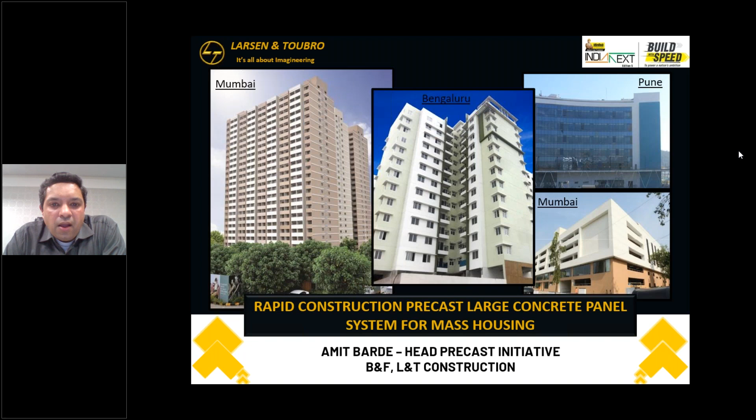So just a little bit about the company. Of course, all the numbers are there. I'm not going to spend time on that, but what we take pride in is being a professionally managed company and one of the most innovative companies. We call it Imagineering, not just engineering.

There are various verticals amongst the company. Again, I specifically come from the buildings and factories group right here, and that's where the focus is on buildings, and again more on residential construction. Not a lot of people actually know L&T in the residential space, right? Usually it is all infra and huge projects, but we do a lot of residential work. Usually in line with the company's name, the largest and the tallest L&T, what we call it.

So a lot of projects that you see, more than 250, 300 meters, that are going on in Mumbai in the residential space. Mass housing, if you see the project on your left, there are 6 tall buildings, right? It's like a city on its own. That's the kind of projects we're looking at. Of course, on the commercial space, public space, we have the Statue of Unity, one of the recent projects. The T2 airport was built in that commercial space.

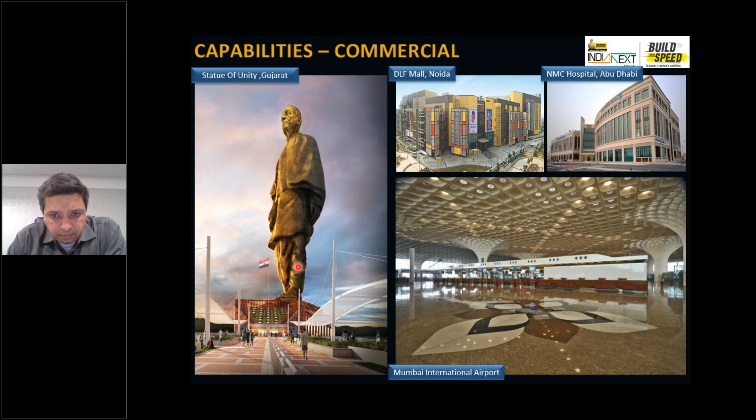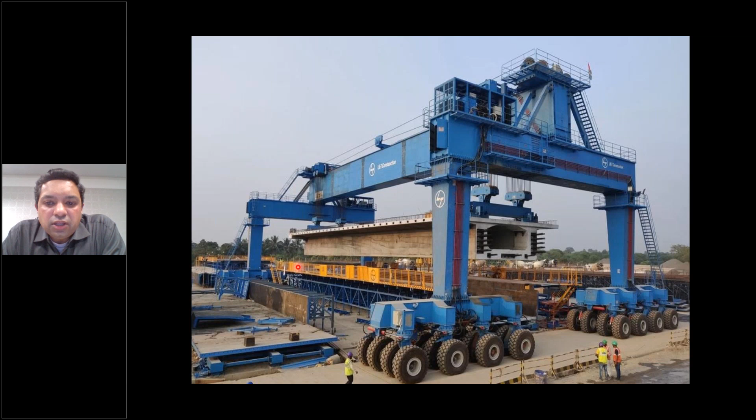If we come to precast specifically now, the Narendra Modi Stadium at Motera, that was total precast, one of the very recent buildings in the precast space. And of course, now we are building the high-speed railway, right? This is all going in precast. What you see in the picture is one of the most indigenous and unique systems where we are lifting 40-meter long girders for the high-speed railway. The entire assembly, what you see, is automatically controlled between those 4 columns that you see with the wheels, and all built in India. None of that was coming from outside.

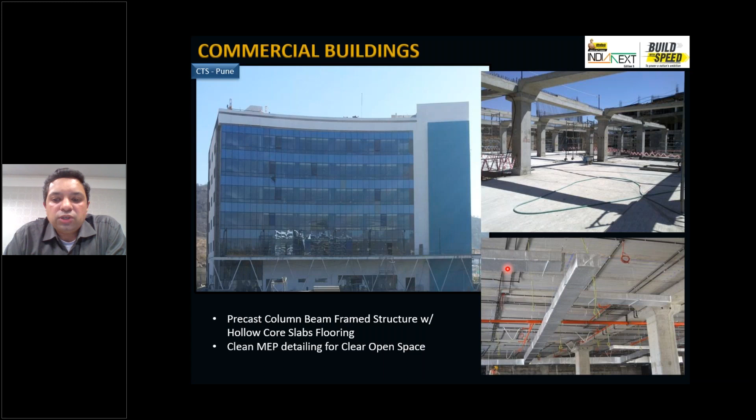This is a Cognizant Technology building in Pune. This is one of the first buildings that we did in precast, around the 2011-12 time frame, right? Commercial building, total precast, columns and beams, and then hollow core, usually 8 to 10 meter grids. Usually with the hollow core system, a lot of questions come on MEP, that it needs coordination and all. If you do that coordination well, during execution we did not have a single complaint or query from the MEP contractor on this job. This was one of the first jobs.

Then this is a parking structure. If you are from Mumbai, when you go to your domestic terminal, you will see this on the left-hand side. If you see it from outside, you don't know if it's precast or conventional. That's the idea. We put a lot of effort into bringing the technology where the end user should not feel any difference just because we have chosen a different technology. So this again was total precast, beams, columns, and hollow core system, same as that CTS building that I showed.

This is in Bangalore for Wipro, where you see all these bands. They were not initially conceptualized in precast, but once we started building, because of the building insets and all, it was becoming very challenging to do it in conventional systems. So only those elements were quickly converted to precast.

This again is a project in Mumbai, the IKEA warehouse in Navi Mumbai. Hollow core slabs we have done before, but there are 2 unique things. It's a hybrid structure where you see a steel frame, and then the floors were put quickly using the hollow core system. It's probably somewhat difficult to gauge the size, but this is one of the deepest hollow cores that has been used in India in the building sector. It's a 400 deep hollow core element, and the span is about 16 meters. And the warehouse load is about 750 kg per square meter. So the largest load and largest span hollow core was used.

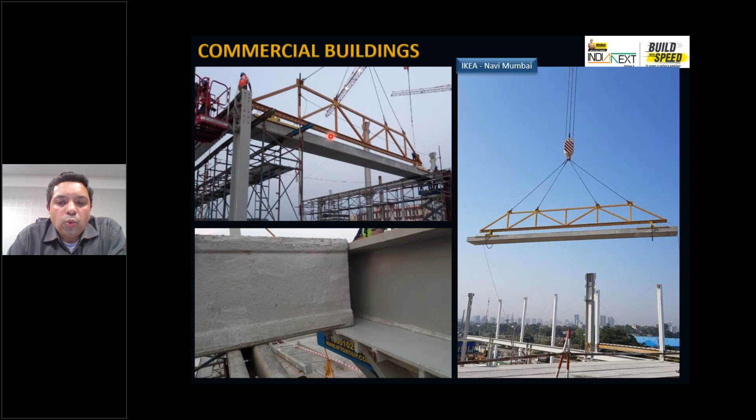This is one of the jobs now ongoing in Vizag, where we are doing a total precast substation for a refinery job, right? That substation is like the heart of that refinery. The refinery project is anywhere between 15,000 to 18,000 crore. The substation is 35-40 crore.

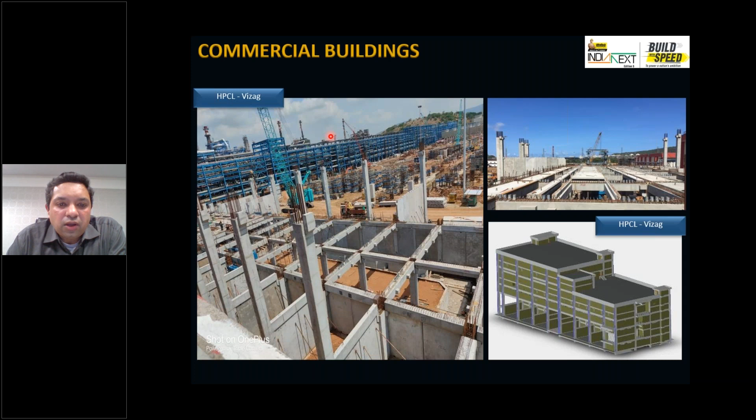Structure, but without that the entire refinery cannot survive or cannot operate. So we took that call to make it into precast, again for that speed, so they can start operating the refinery.

This is an office building in Hyderabad. When the building started, the architect had the vision of these C-shaped panels and bands, and this was conceived in block work. After starting the building, we took that call saying it's just too much block work to do plaster, and all these bands and the exterior facade were converted into a precast system.

Why I'm showing this is, even for your competition now, this is the theme we are saying: speed. Wherever that speed demand is, we are trying to make sure that, and we are going to come to that in discussions later, we move it to the factory, move it offsite, make it industrialized, and reduce site work as much as possible. So in all these key projects, at the heart of it, you're going to feel these 3-4 things, which are the need. I'm not doing precast just to push precast, right? This is coming from an inherent need of the company or the projects that we do.

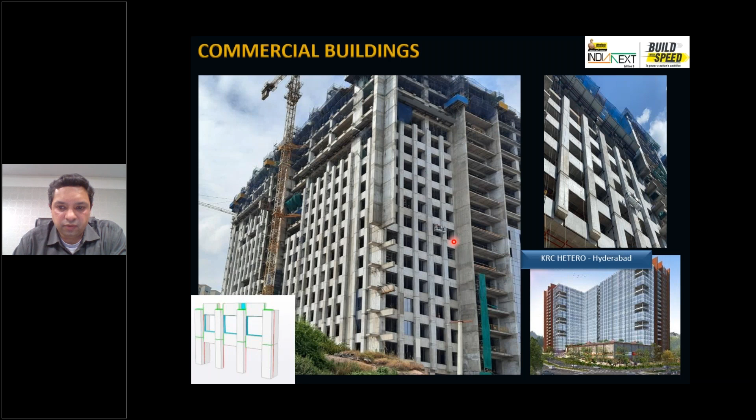So what we said is we will do precast panels, and we proposed welded connections. Usually my precast panel will take 2-3 days to finish, right? You erect the panel, do the jointing, do wet concreting. Here with the welded connections, because I have a steel structure, the mock-up panel itself was attached to the structure in just under 30 minutes, right? That's the speed, that's the ultra rapid we are looking at. Erected, connections welded, and ready for the sealant and finishing activity. So that's the crux of why we are looking at these precast options.

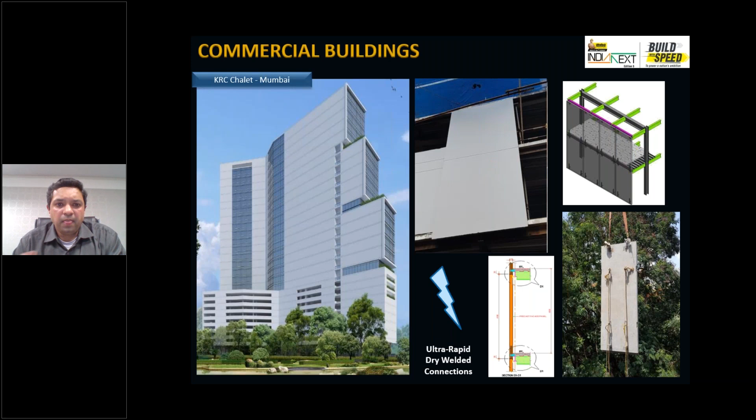Now with that, coming back to residential, from this point onward pretty much everything will be discussed around residential, and more for the mass housing scope. Mass housing is not new to us. A lot of projects over the last 15-20 years. These are all conventional system projects, but why I wanted to put it is that's the experience under our belt to know what the residential client wants, to know what the residential construction beast is, right? Commercial is a very different construction system, a very different place where you are only dealing with one client. Here you have several flats. Each flat has probably 4 or 5 people living in it, if not 4, at least 3. So that many clients you are looking at.

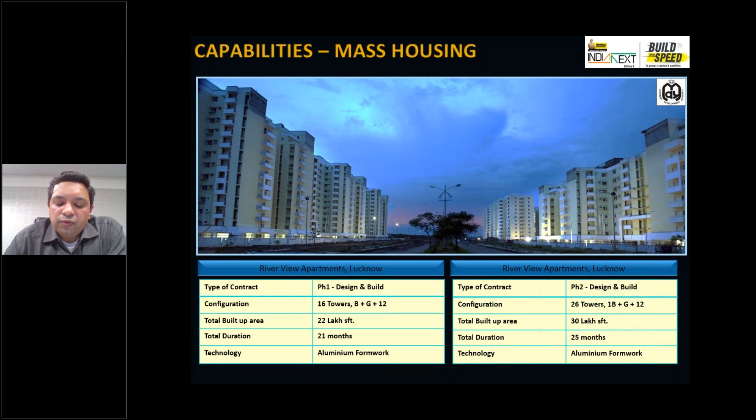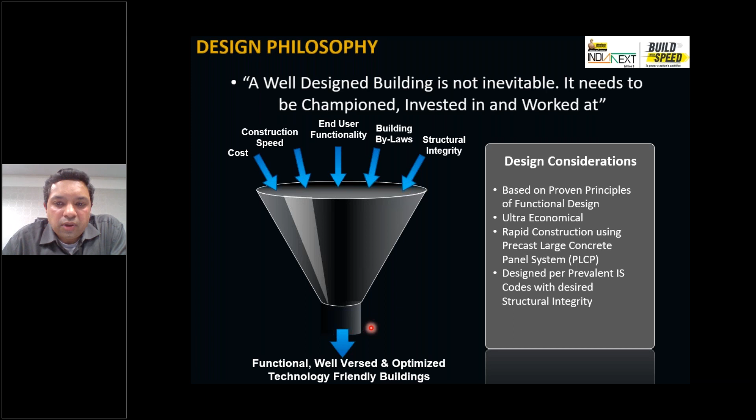So if you are looking at any new technology, all these aspects will then funnel through to get you what you want. Then it will be automatically accepted by your client and by your end user. And how you do it is not just one entity, right? It's not going to come that I do the structural design and your building is ready. You have to start from your foundation, your services, the coordination, where each pipe is going.

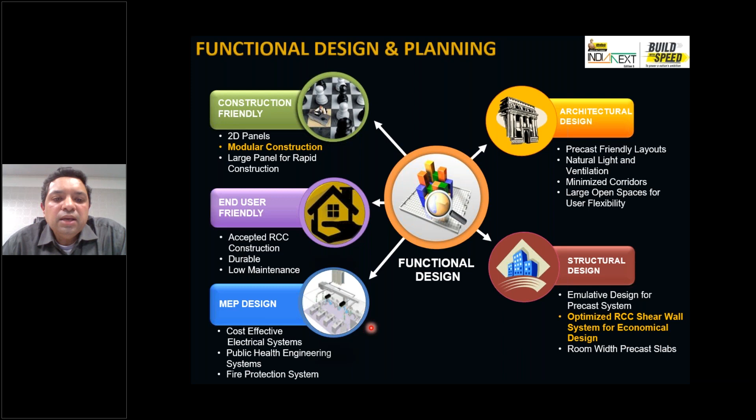This is where that beam is coming into picture, saying my plinth beam levels are checked so my rainwater pipe is not going to hit it. These are minute things where over the years this was done, for lack of a better word, jugaad, kuch to kar lenge and then we'll see. But we are not there, right? We want a functional design, we want everything right on the paper.

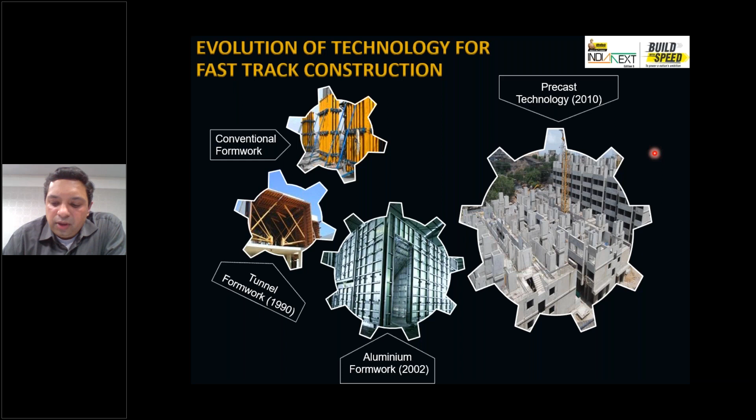With that poll, next what we are looking at is why we need precast, right? We started precast, and again I keep repeating that L&T is not in the precast business. This precast has evolved over our need. So to put the data behind it, on your screen you see we took one project, same area, same location, two plots, maybe adjacent within a kilometer or two, and one was being done in cast in place, the other in precast.

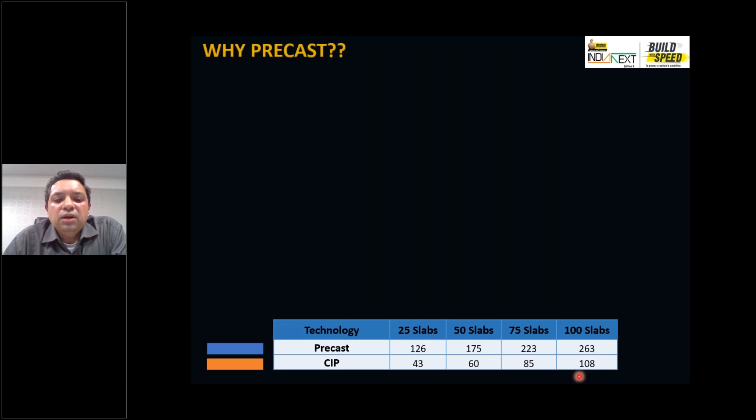We tracked the time required for cast in place construction and for precast construction for the first 100 slabs, in terms of 25 slabs, then 50, 75 and 100. If you see this data firsthand, you're going to see that our CIP is doing much better, so why would you want precast, right? This is where your technology comes into picture. What resources you're putting in, at what cost you're doing it, that's what matters, not just the number of days on the screen.

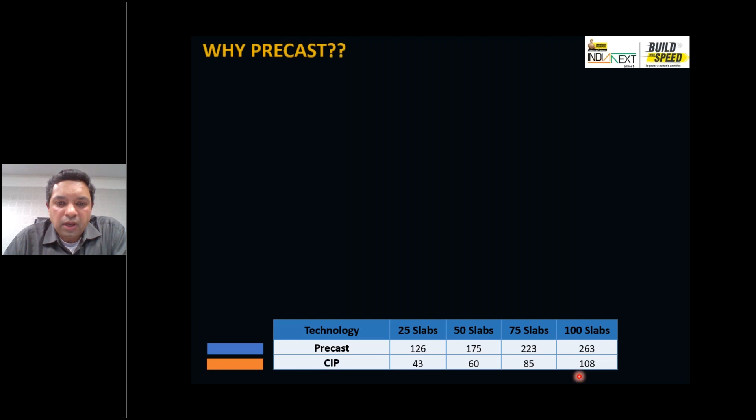When I look at conventional, this is using aluminum formwork, you have to look at how many sets are deployed. That's my key resource. If you start looking at asset turnover ratios, at what investment you are performing. In the aluminum system it is the aluminum formwork set. In the precast system, it's the crane. That's my key resource, the key bottleneck at the site. So how many cranes I have put, and per crane what am I getting out of that.

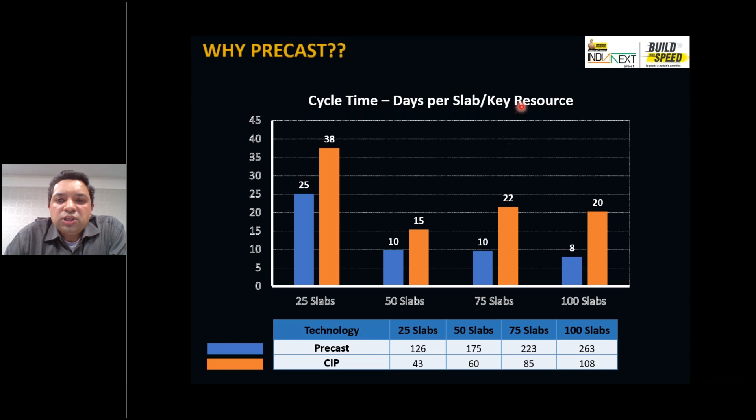If you look at that in terms of resources put and the cycle time, days per slab, you will quickly see that even if this is quicker, it was done with many more sets. There were almost 20 plus sets put in. So per set I took 25 days to build one floor in precast, and in cast in place it took 38 days to build one floor.

So it's obvious that precast is doing better in terms of your resources. If I need even more speed, because this is designed to what is planned and what the client wants, I can just put another crane and get more speed out of it. Putting another formwork set has its own issues, right?

The second thing is, if you look at how we improve things - these two projects were not going at the same time, there's some delay between them. Usually you take a little more time when your project warms up, and then you improve your speed. This increased again for the COVID second wave, and then it maintained. If you see precast, this has quickly built up, and once it built up, it sustained that cycle time. That's what I wanted to drive through this.

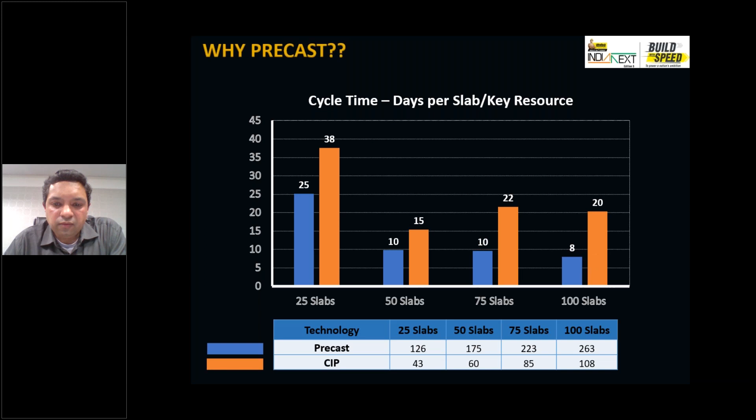The other thing - if I do the same project again, whatever we estimate usually, if you look at aluminum formwork, we want fewer people at site. We want less resources so that my risk is lesser. One of the biggest risks in construction today, especially residential, is having your workforce at site. If you recall, when COVID waves hit, the biggest challenge was getting people back - even media was talking about it. So if I have fewer people doing the same work, my risks are less, the challenges are less. In terms of that entire activity in aluminum formwork, per cubic meter of concrete I need about 5.5 man days, so assume I need 5 people there.

For the same thing in precast, which is conventional precast and automatic precast - this is what we are doing now. We can even go to fully automatic, what the global industry usually does, and it will improve even further, but I've kept it at where India is right now, what we are doing at best. I'm looking at 2.5 man days, so it's about half. But that's not the real story.

Out of these 2.5 man days, I need about 1 for production and only 1.5 at site. So if you compare site activities between precast and conventional construction, I have about 70% reduction of site activities or site requirement of people. This is where I'm covering my risk - I don't have to worry as much about having the workforce at site. Workforce at factory is a very different ball game. We have a much higher retention ratio at factory because they're working in a controlled environment, at ground level, covered shed. I don't have that worry of not having people - whoever is there, they always stay.

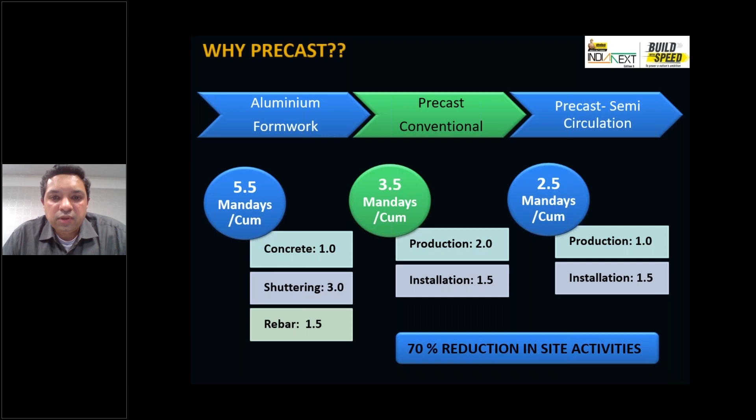So in a nutshell, what we are doing on the other line - if you look at conventional construction at site, the activities these 5 people or 3 people are doing: building the formwork, putting the reinforcement, doing concreting, block work, plastering, POP, painting. Since we took up the aluminum formwork system itself, we have completely avoided that work - this is the work where you need maximum workforce, the block work, plastering, and doing that leveling and everything. So instead we are doing this shear wall system using aluminum. Forget precast for now - even why aluminum became popular is because these activities were removed. I'm going to talk about that a little more later.

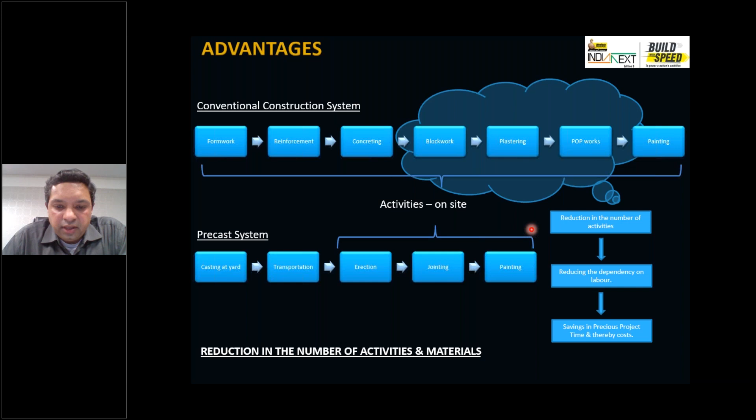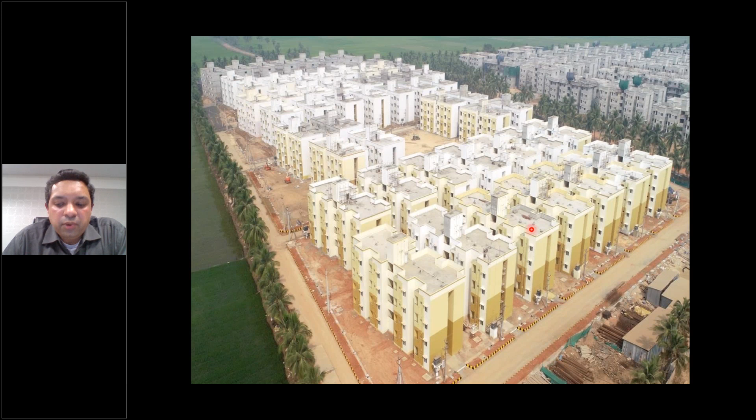Now what we are doing in precast is still - this takes a lot of time, that 5.5 people per cubic meter we talked about - we are taking it off site and doing everything in the factory, finishing it there, then bringing it and installing it. That's the idea, and where we will adopt it is in projects like this - this is our AP housing project, 1 lakh houses straight. This is what they wanted, same buildings, and this is basically our housing demand. We keep talking about 12 crore houses everywhere, but if you look at a single project in nearby 3-4 plots, they had this demand of building 1 lakh similar houses, ground plus 4-story tall buildings, and you cater to that. Now how do we solve that challenge?

We just look outside, right? We look at our neighbors. We are not the first ones to go through this challenge of social housing or mass housing. Singapore has done it, Shanghai has done it, Tokyo has done it, Hong Kong has done it - all these countries have done it. And these are just our neighbors, with similar setups and similar situations. How long did they take? They took about 20-25 years to do that. And we are looking at doing it in 7, 10, maybe 15 years now, but at a drastically smaller time period. This is where speed comes into the picture.

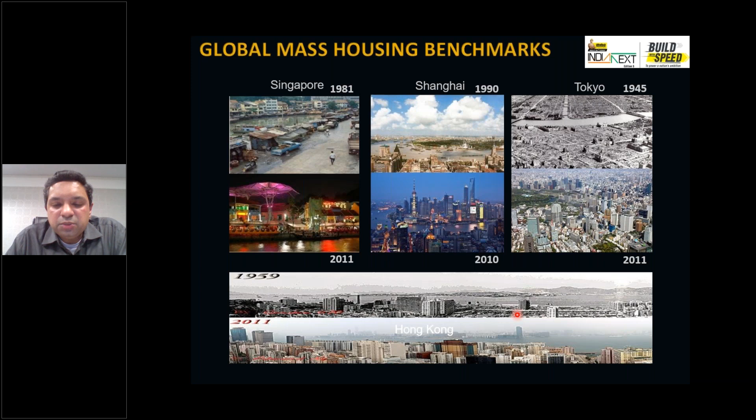How will the speed come? Using technology. Have we not adopted technology? In all other aspects of construction, we have adopted technology, right?

I am from Mumbai. We are building the metro all over Mumbai, the coastal road, the Trans Harbour link connecting Navi Mumbai to Mumbai, and the high-speed railway. Some of the latest and greatest projects using the greatest technologies globally are being operated in Mumbai at the same time. They cannot get better than that. But still, when it comes to residential construction, we are lagging.

We have to do something, and this is what we are doing. How these other guys, our neighbors, are doing it, the only answer that comes for all these countries is industrialization and mechanization. Is there anybody now stitching our own shirts? No, we are not stitching our own shirts or our own shoes. There are factory made products in that range, and we are very well adapted to do that.

This is where residential construction has to go. There are set standards, set standard units, especially for mass housing where we are looking at large volumes, and whatever functional requirement exists, you put it in the factory, make it like a car, make it like a shirt, and then construct.

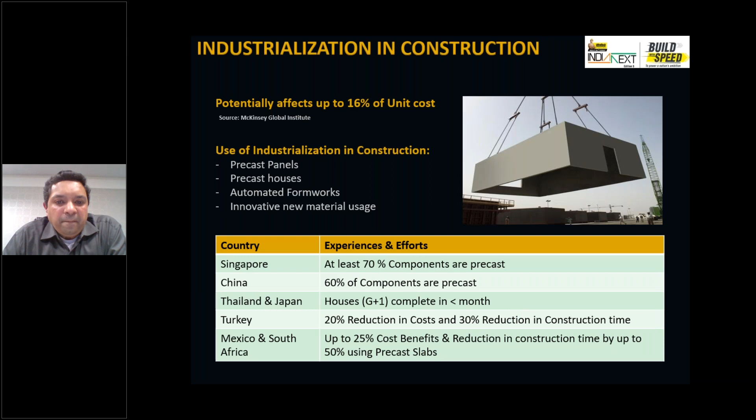So that is one of the biggest driving points, if nothing else about technology, if you want to take it home today, is this industrialization and mechanization. That's how we can get that speed. That's how we can get the answer to our solution.

But block by block, you have to set it up, do plaster. We don't have people anymore to do this work. We keep discussing on various forums with various people, and one thing discussed maybe 3-4 years ago that has stuck with me is: if you see 2006 in India, your mason's son did not want to be a mason. He wanted to do something else, maybe technology, some other job, but not construction. In 2022 now, even the mason doesn't want his son to be a mason. That's where we are, and that's great.

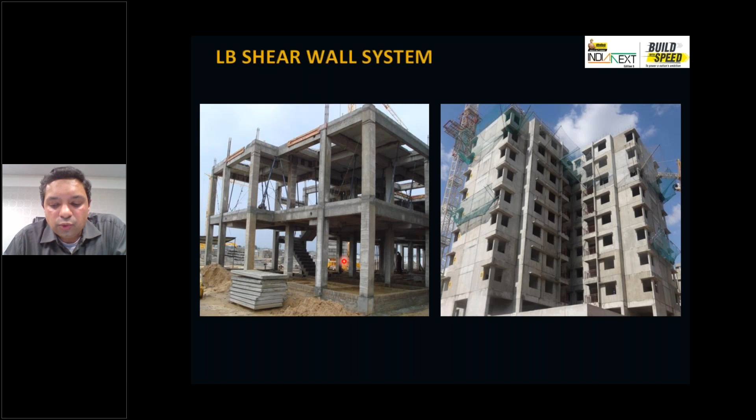India is shining, we are going forward, society is improving, our standard of living is improving, quality of life is improving. But for me, in construction, I don't have people to do the work that we had earlier, and that's where we are leaning towards this technology. So that's the second point I'd like you to take home: we don't have a skilled workforce anymore. Whoever is there doesn't want to be in construction, so very limited people are available.

The third and last point is maintenance, what your people or end users want. One of the biggest maintenance items in residential construction today is plaster, internal or external. Plaster was never meant to be a long lasting product. It cannot be, it's a sand cement mortar mixture. It absorbs water, and over time it cracks, and over time the paint fades because of this water absorption issue.

So what we are doing today, the technologies we are evolving, evaluating, or trying to adopt, not just precast but any technology, we are avoiding plaster. That call was taken in the 2002 timeframe, when aluminum formwork became popular, for this very reason. Especially in high-rise construction, I don't want to go outside, put up scaffolding and finish the building. I will pour concrete, even if it costs slightly more. The net tangible benefits are much higher compared to the upfront cost.

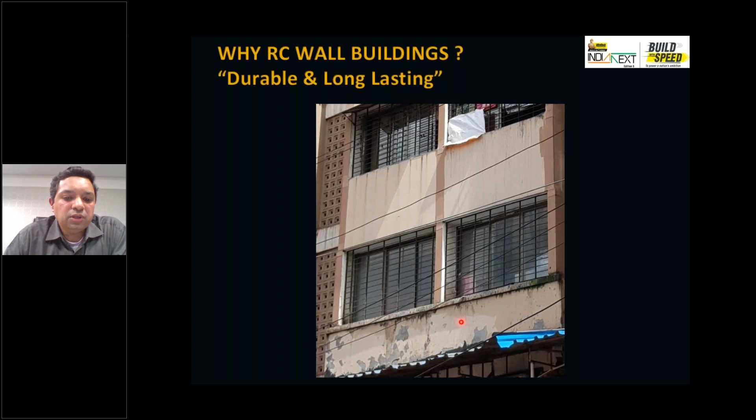And this is one example. This is our building, a precast building, but the lower floor was done in cast in place because it's a non-typical floor, done with brick wall and plaster, and the building above is in precast RC concrete. This picture was taken about 6 months ago. After 7 years, that building has been standing, and the plaster fall started right after a year and a half, that's how the water absorbs, then the moss, with the same maintenance and treatment. But on the upper portion, you see no cracks, nothing, just some shadows, but this is where the paint falls and fades. This is why we are doing this aluminum formwork system or the precast system.

So some of the landmark jobs now getting into the case studies, this is one, that same job actually, Pragati Towers in Mumbai, ground plus 23-story tall building, about 70-meter tall. Everything after the first floor is done in precast system, factory made, including your spandrels, the walls, the lift shafts, the precast stairs, the whole 9 yards. This was one of our flagship projects. That picture you saw had 3 buildings, we later added 3 more. So about 2000 flats were built in about 3 years time frame. It of course won several awards, and the building has been standing and occupied for the last 8 years now.

The second project, which I'm going to discuss a little more as a case study, is our Provident Sunworth project in Bangalore that we started in 2014. Again, mass housing, but this was for a private builder, not a government project. About 66 towers, 5,000 plus units, all G plus 12 or G plus 14 towers. Total precast system, what you see in the picture is all precast.

Somewhere in the middle of the job, we got a certificate of extraordinary appreciation from the client, so it's really close to our heart, when we finished one G plus 12-story building in flat 3 months, that superstructure was built from the first level to the terrace. That is the strength of this technology. The same footprint building in conventional construction, even aluminum formwork, which is considered the fastest now, would take at least 7 to 8 months to do.

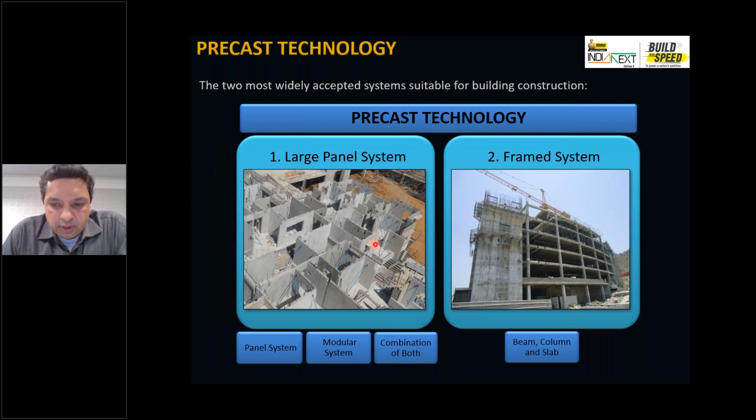What we are doing in general is, let's look at residential construction now. I'm going to take the floor plan what we have, right? We are not there where the floor plans are being built for precast. If you see the outside world, and a lot of architects will be here, so going forward, I hope the design industry shifts towards knowing the technology they are going to build before they start the drawing board, right? And the floor plans are built suitable for the technology.

Here in India, I think we may or may not go there, but again our end user has requirements. We need in and out layouts. We don't have boxy buildings. I don't see residential buildings being boxy. So what we have done is worked around saying, okay, my floor plans are going to be in and out. They are going to have complicated shapes.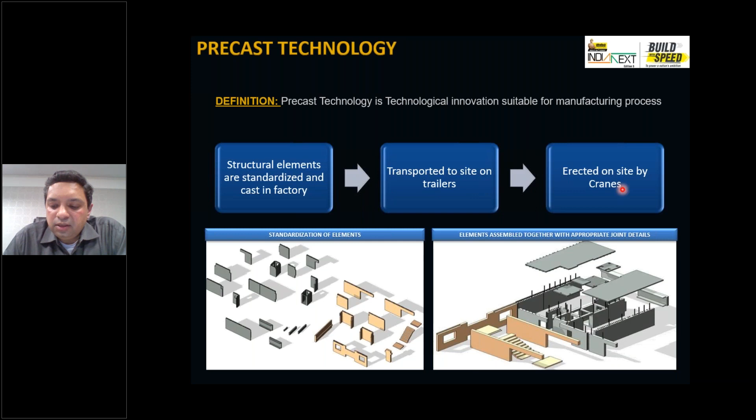I will work with those shapes and try to make as much as possible 2D panels and then convert it into my precast systems. That is the work that I have to do to make sure you get that performance out of it. Once you do that, all we are doing is the layout is ready, make these elements in the factory, put it on site, erect it by crane. It is not rocket science, trust me.

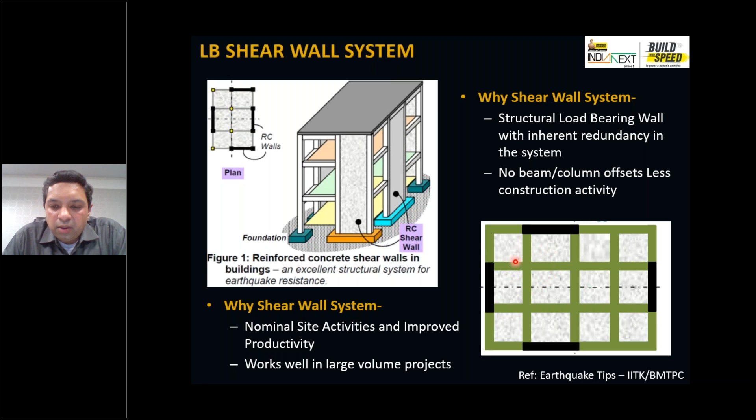How we do it: the structural system, like I said, load bearing shear wall system, that's the crux of it. There are various structural advantages to it, but if you look at this floor plan here, this is how we were doing buildings 20 years ago, where there are some walls and then your beams and columns. What we are doing is we are trying to see if we can do all walls. Some of those walls are still my shear walls, the balance are my gravity walls. It is equivalent to your beam column system, right? Not all walls are shear walls in the system.

Now once we pass this, what are we doing in precast? The precast philosophy is the next step of your aluminum formwork system, nothing else. Exact same system, same building, only thing is I split the panels and make them in the factory. How do we connect it? We are using this emulative approach, right? We can't get into too many details, but just focus on the word emulative. What that means is if you use this emulative detailing, your precast building is going to behave equivalent to your conventional building, that is aluminum formwork.

This is from the American Concrete Institute. They have specific standards for emulative detailing. They will tell you exactly what to do. If you do that kind of detailing, the wet construction connections, you get equivalent performance. There is a Precast Concrete Institute, again in the US. They take it even a further step. They said that if you do this emulative detailing, regardless of seismic region, you will get performance equivalent to that cast in place system. And this is what we are doing.

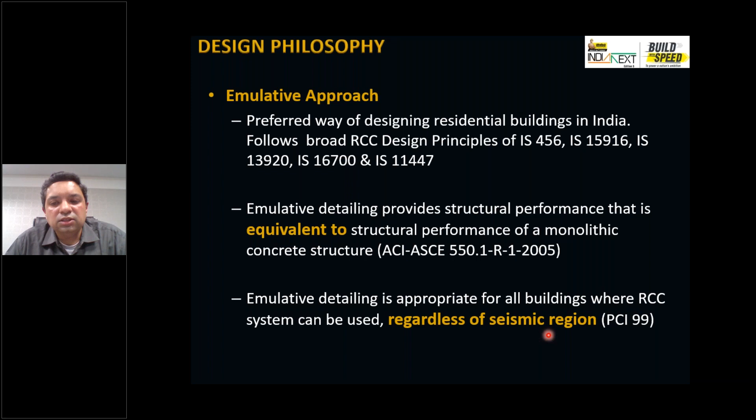What is not emulative? It's welded connections, bolted connections. We are probably a couple of years away in India from adopting those. There are various reasons. But if you want to see that emulative performance, we were also getting that question a lot. So what we did is we ran a full-scale test program in the 2016 timeframe, saying this is how I'm going to do emulative detailing, and I'm going to validate whether it gives me equivalent performance. Right? That word equivalent is important. I don't want better performance. I don't want superior performance, because all our design codes are currently built around the RCC system.

So I just want to make sure that I build one specimen in the conventional system. These are my two shear walls, foundation if you want to imagine, and a slab on top of it. This is a full 3-meter high wall, right? And we are validating the seismic performance. This was done in the SERC Chennai lab. This was one of the very few labs at that time which had this seismic actuator, which pushes the building and pulls it in a controlled manner, so we can study in detail how the system is performing. So this cast in place specimen was prepared,

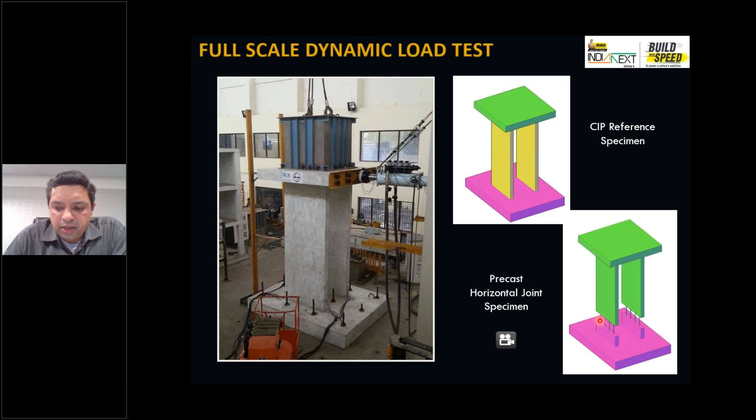and then the precast specimen was prepared using the joints, right? Again, the idea is, like I said, we want to see if they're performing similarly. We don't really care at what level. So these precast joints were emulated, and then you look at your force versus displacement curves, right? In engineering terms, that's how my toughness is calculated. The area under the curve is going to be your E values, or your R values, equivalent performance, or the ductility, as we call it. So again, precast and conventional have to behave similarly, then we get equivalent performance. And usually I get told, okay, see, your equivalent performance is not there, the cast in place wall is so much higher.

But if you really look at that, SW1 is my cast in place wall. This is that CIP construction specimen, and these two are my precast specimens, and these are behaving similarly. This is what we want. If you calculate the area under that curve, you are going to get similar performance. This is actually one of the precast connections that works better than your lap connection. That's how you see the higher values. All these walls were designed for the same design capacity, right?

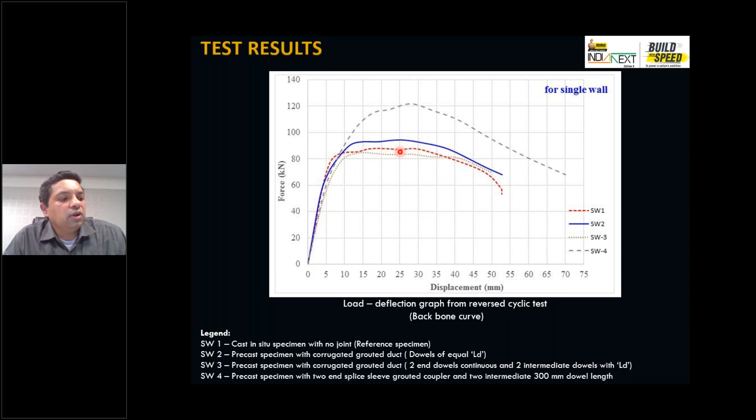So these are the grouted couplers we are using now, after 6-7 years of following up and making them available in India. But these are confined couplers, high strength grout. They use M100 grout, and that's how you get slightly better performance out of that, right? Now at that time we didn't have any testing in India, so we went to Hong Kong and got this tested for the cyclic performance. That's where that seismic detailing is important.

So if you want to look at it in one summary, this is a reverse cyclic test. So if this is your 0, it is pulling and then pushing, 95% of tension to 50% compression. So you get that cyclic behavior. They have 20 cycles, then they pull it to twice the yield and do 4 cycles. They pull it to 5 times yield and do 4 cycles, and then they pull it to failure. And the test says that your failure has to be in steel. That's where you get the ductility, and not in the brittle portion where the grouted connection is. So this is one of the key validations of how you get ductility in your precast systems, right?

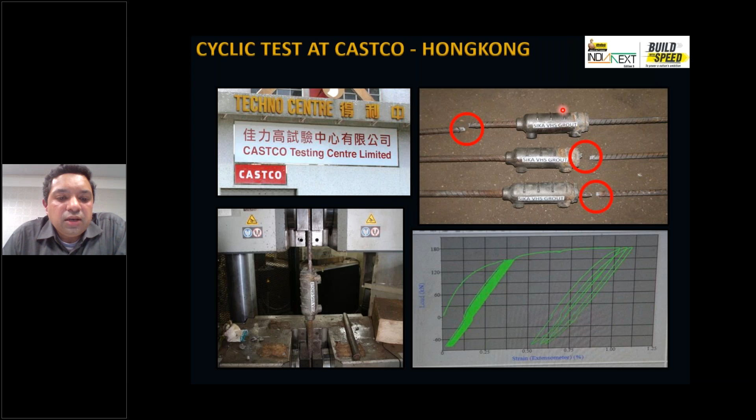All these connections, you see beautiful yielded curves; this is where your steel is yielding. It's giving you that indication, whatever you learn in your schools, right? That you have got the failure warning. It cannot be a sudden failure. So this yields, gives you enough warning, and then fails. The grout does not fail, so your system is ductile.

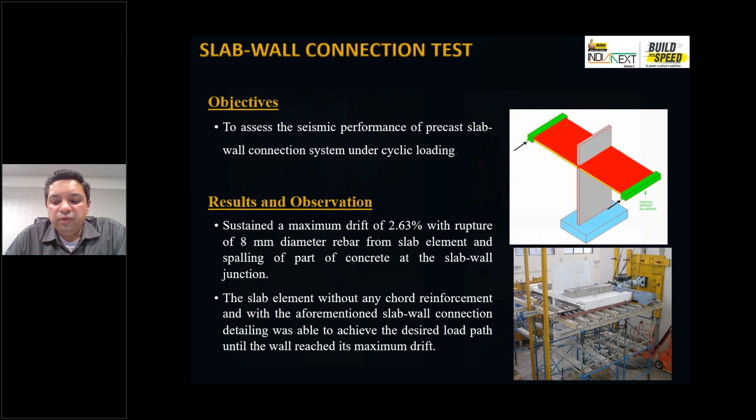Same way we have done other systems, where we checked slab and wall full scale testing again, where we looked at the load path, whether your diaphragm action is working or not. Then we looked at the vertical connections and saw how the performance is going. So that entire connections portfolio is there, validated. Once that is done, with emulative detailing, you are going to get similar performance because your concrete elements are much better. I am using at least M50 grade concrete because of my early removal strength and all. So that element is going to be much superior to the conventional system, and your joints are validated.

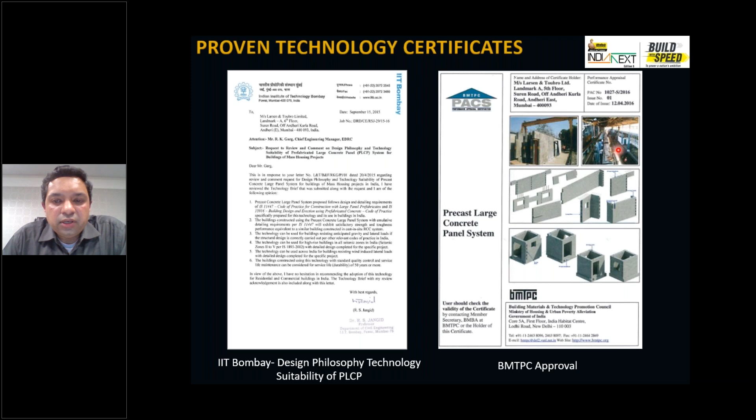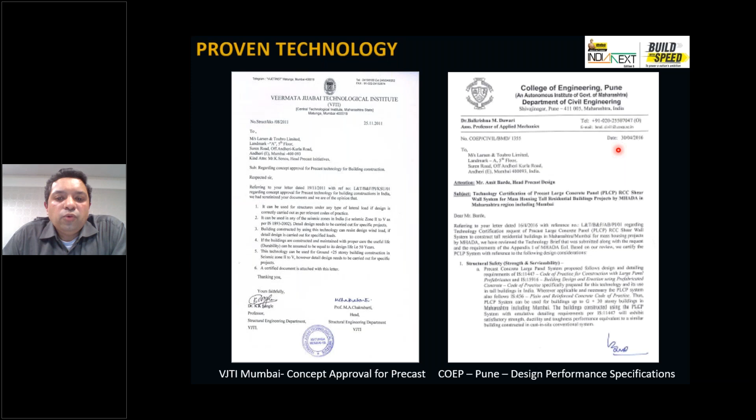So on those lines, we now have several approvals, everything in place from all leading institutes. IIT Madras is usually our peer review agency for all precast projects. You go to IIT Bombay, we have that certification. And including the government agency BMTPC, which has certified it for government projects. So that's quickly the design philosophy and how we have evaluated the technology, how we have made sure that all the requirements are with us.

All these test programs were not really needed, right? This has been done outside. Of course, we did it slightly differently; the reverse cyclic way is not even done outside. But we wanted that validation. We wanted to make sure that tomorrow nothing would get questioned and that the entire portfolio is ready. That gave the confidence to go and tender for a 5,000 crore project with the technology, right? You cannot go for that large a project on a whim. The management also would not allow that. So these are the requirements to go through that.

Right? Now, how the technology is built, construction, maybe 10 minutes, and then, Deepal, I think by 8:10 or so I should be wrapping it up.

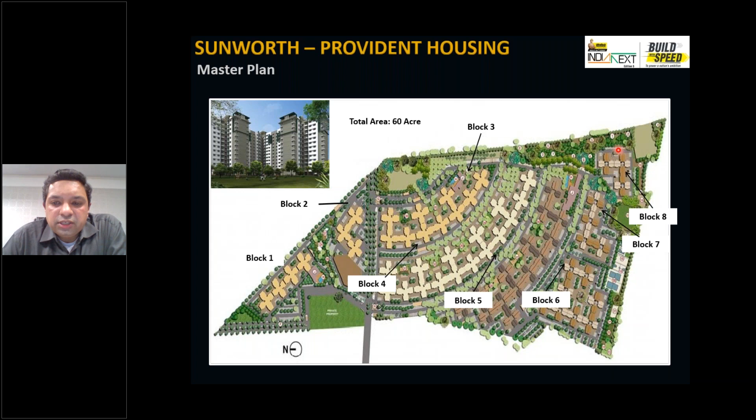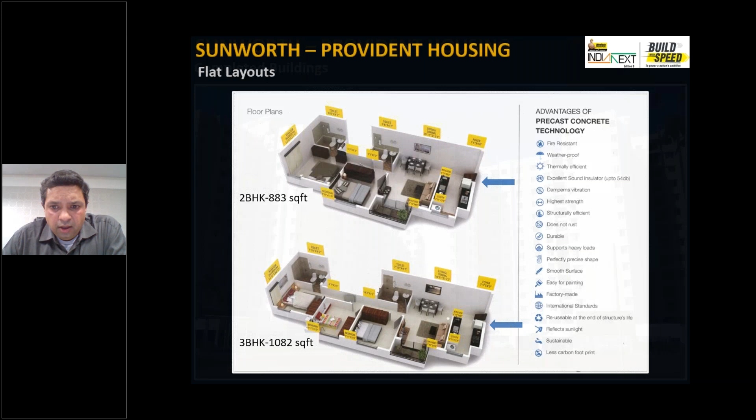So this is that same project, Provident Bangalore, 66 towers that I mentioned, 2 phases completed. Very typical flats, about 800 carpet, 1080 carpet, whatever layouts the client already had. We did not change anything in those layouts. Finished project, some more pictures if you want to go through it. But everywhere you see detailing, the focus is making sure that you get that similar finish, right? All the joints, details, whatever is there, we detail it out. We sit with the architects, we make sure.

Only I know what the differences are, but a layman would not feel the difference, right? We even made the sample flat using the same precast systems so that they get to see the feel of the technology. This is one of the finished flats from the interior, right? Once it's finished, even our own engineers would not know where the joints are. That's the kind of attention to detailing that is done to finish it.

Now towards the technology. If you see any global, where I worked 10 years in US, first class fine factories, all enclosed sheds, everything. Even there were air conditioned factories in a couple of locations. Compared to that, you are going to see this is my Bangalore factory, right? It is open. There is always the cost pressure.

The way our infrastructure is, we cannot afford to transport these panels from a centralized factory for that volume. We don't have that kind of road network. We don't have that kind of bandwidth where I can ship 150 elements every day. So what we do is we set up the factory at the site. This is a temporary factory. Project is 4 years. At the end of 4 years, we wrap up that factory. We don't even use it for the new project, or at least that's how the philosophy was earlier. So that's how you will see a very minimalistic factory.

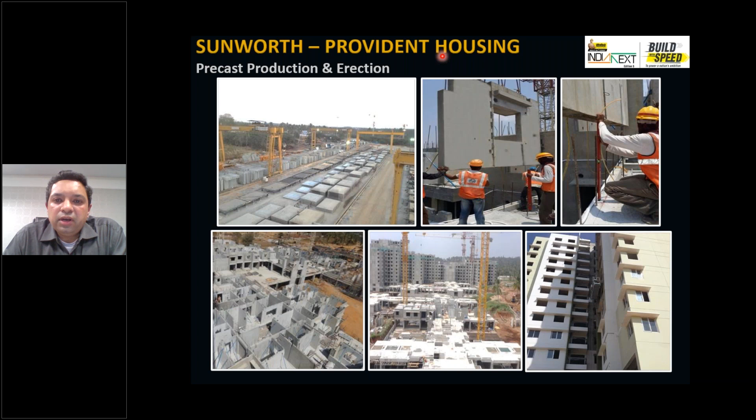This picture, if you see a number of cranes, right? It is in my control. If I want to put up an extra crane, I can quickly do that, increase the output. The factory is already sized for that. If I want to slow it down, I will take it down. So that way we can have better control. Erection activities are fairly straightforward, right? You get cleaner. There are connection dowels. They know what to do, make sure that the line and length is there. Panel is already ready, flat and in good to go shape.

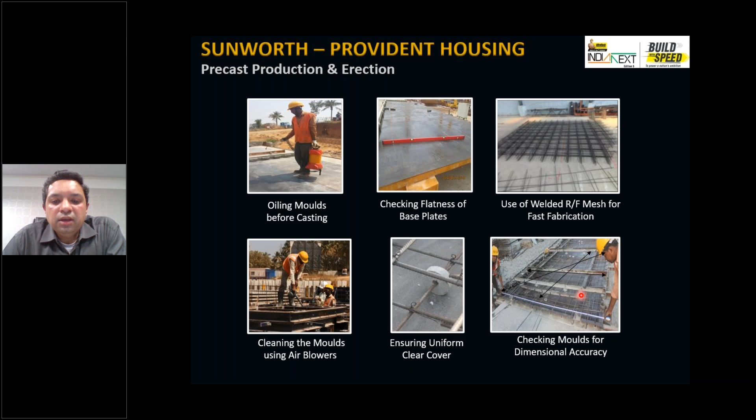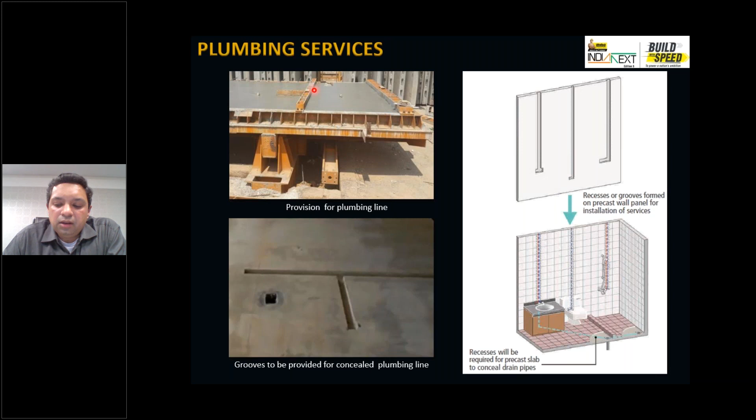Usually, if you see, electrical embeds are concealed. MEP pipes and all we do undersunk, preferably. If not, we can do the conventional sunk also. But what we do for pipes usually is we leave the chases so that there is some access, because conduits you don't need that. Pipes, no matter what you do, there are joints, they may leak, and you can't jackhammer an M50 concrete, so we leave that and patch it back and work that out. So this is how the chases are made in the panel so that they're shipped out.

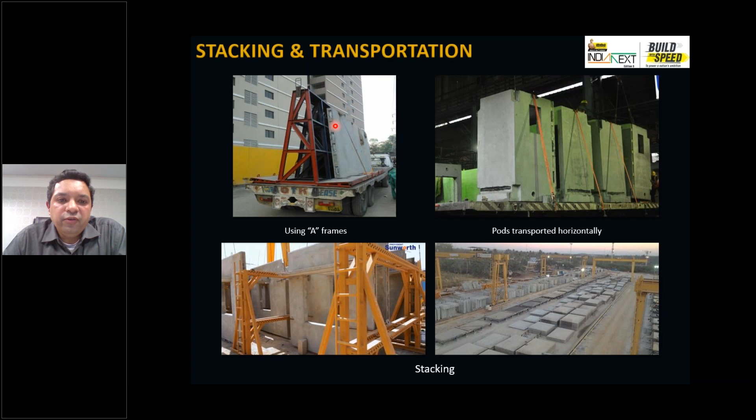Transportation, because my factory is right at the site, I don't have to worry a lot about it. We have now standardized norms, the A-frame, V-frame, trailer loads, and a very well established system to do the transportation. Again, comes back to site. There are very set guidelines established. They know what to measure. They know how to do the leveling. We have the push-pull props to set the levels after it's erected. Once they do that, everything automatically is going to fit in its place.

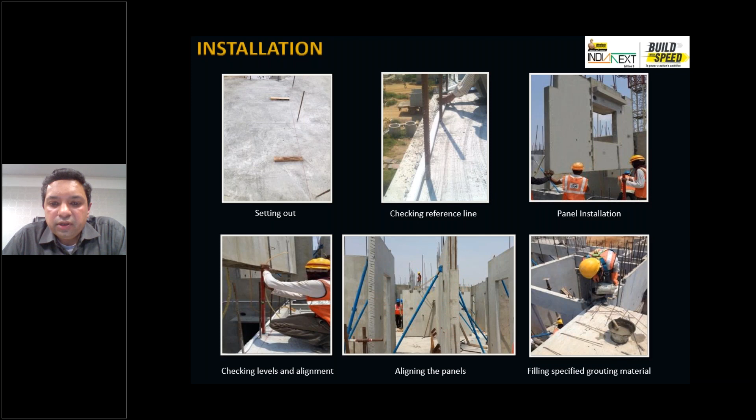Yeah, I think some of the same pictures again at the larger scale. But yeah, this is how that project, I think the architect had conceived the project in 2014, and this is how we finished it and handed it over in 2017-18. So that's that. One other thing in residential now that we are exploring, that I don't have to do the entire building, right? Again, I am catering to my site's demands, what they want in terms of speed and finishing. So if you look at a typical residential unit and you ask your construction manager, what are your biggest issues after the building is done, right?

If you see 15 years ago, we were doing a typical building in about 8-9 months, maybe 10 months, and then we were finishing in about 6 months. Now suddenly we have brought these new technologies, and instead of 10 months, 11 months, I am finishing that in 6 months, but finishing is still 6 months, right? So now finishing is under pressure.

So then if you ask him, he'll say that living room, bedrooms, I don't care, but my kitchens and my toilets take the most time because most activities are there. And then it's usually a very small space. So I cannot have 3 agencies working at the same time. It's one by one. So then we said what we will do is we will look at finishing those in the factory. So what you see in the picture is a 10-ton element, which is finished.

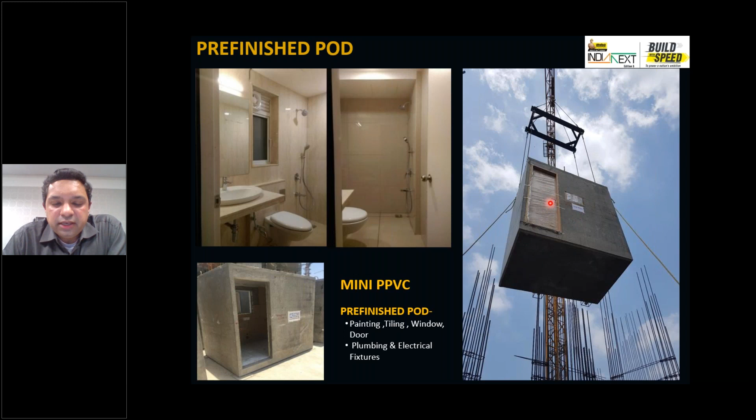These photos are the finished photos of the inside of this unit. So everything was done in the factory: finishing, waterproofing, coordination, everything. And then the pod was just kept before the slab was to be poured. Excuse me. And then we did the construction. When everything was finished, they came back and they only replaced the door because it needed protection. So they replaced the door and everything inside is ready.

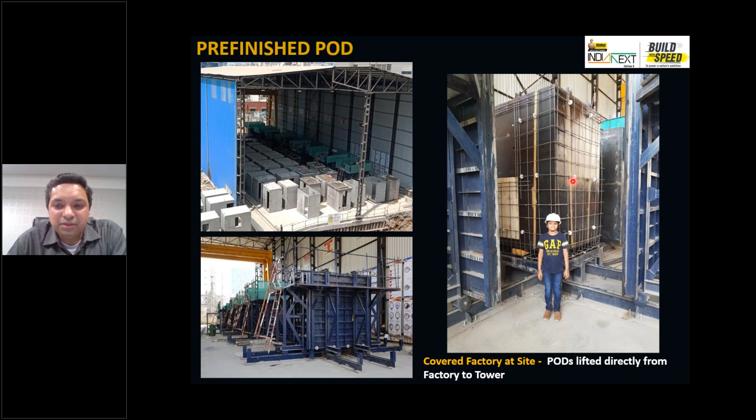Again, this is not child labor. This is my son. I took him on a Sunday to visit it, and he was so excited about this. He's still talking about it a year down the line, saying those were the finished bathrooms, right? This is how we want the younger generation excited about the technology. He still talks about it and thinks, why can't we put finished rooms? And I think hopefully in a couple of years we'll do that too.

So with that, now we come to our quality control, what we are doing in quality control. And for precast, usually quality control means how are you controlling your leakage, right? I'm going to be very upfront about it. And this is how we are controlling the leakages, right? Are we the first ones? No. If you see the picture, this was a building built in Mumbai in 1972. That's about 50 years now. I think the slide says 43. It's an older slide, but it's about 50 years now.

Shirish Patel and Associates built this building, right? Up until 2016, we used to roam around saying we have built the tallest building, which is ground plus 23 story, and then we came across this building. Since then, we've stopped that, right? Total precast building. Each flat is probably upwards of 15-20 crores now. People are living in it.

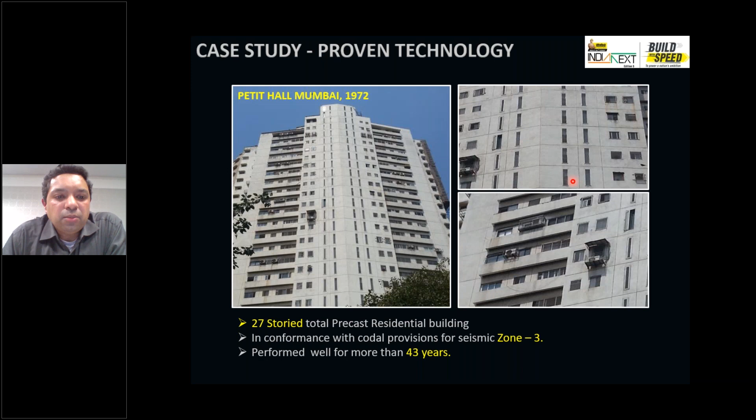Building is functioning. They have maintenance issues. They have issues where some joints are leaking, this, that. But the building is occupied. The owners don't have any significant complaints about it, right? So this is where that durability, this is where the joints, there is a live example in front of us. This is how we have evolved in terms of joints over the years.

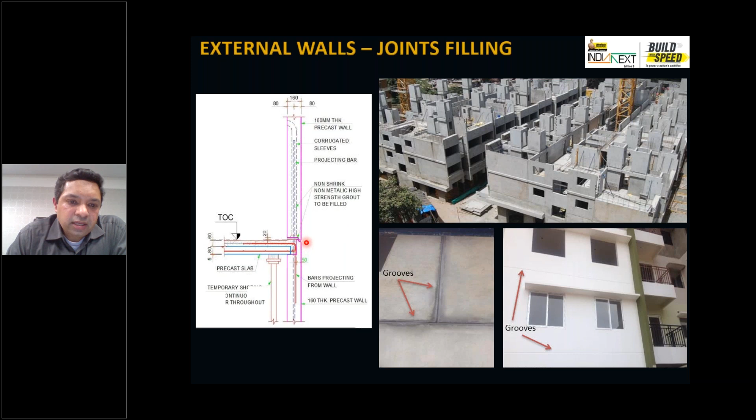After the buildings were finished, most people were thinking of that as an architectural treatment, but it was really done to hide the joints. From an erection standpoint also, if you see the panel swings, a lot of times they get damaged. We don't have that kind of control, so our guys also don't like it. So what we did next job is we built that inside the panel. So we stepped it up, and on the Provident Bangalore job, we have done that inside. So outside it looks flat, but inside this detailing is there. This is where, if you're looking at competition, maybe improving the technology, everything lies in making sure your joint is covered and controlled.

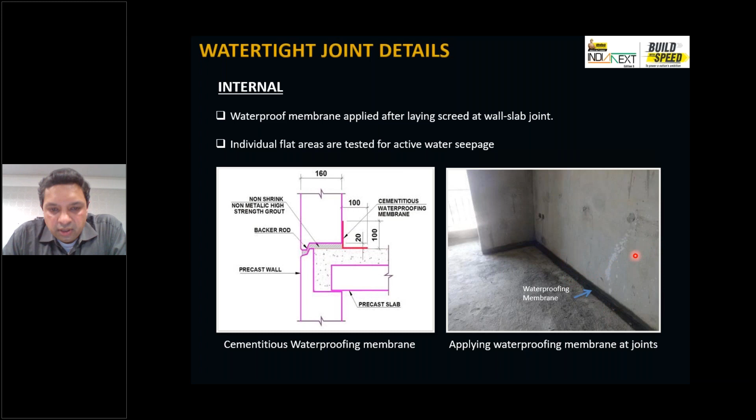So there is a step, there is a non-shrink, non-metallic high strength grout, there is an additional waterproofing that we are doing everywhere, right? The philosophy is water should not go from one room to another as well. Forget the flat. So all rooms we are treating that, making sure that it doesn't go. And after we treat it, we make sure that actually they behave like a water tank. We are literally building water tanks now. So we flood the flats and we actually pond water and make sure that after 4 hours it is taken out.

But how are the lower flats doing, right? How are we seeing the leakages and all? And do we not get any leakage? We do, because it is not a water tank, right? We're trying to build it, but it's a residential unit. So there are some spots, some areas where we get the seepages.

But from 2012 to 2022 now, if I have to put my experience, a lot of times I call myself not a structural engineer, forget it, I'm a waterproofing engineer. But if I had a leakage problem in the 2012-14 time frame, today I have only a seepage problem, right? There is a big difference. Leakage is where you used to see drops. Right now, whatever detailing we're doing, we see some seepage spots which dry also, and we have to treat those, right? I don't have dripping water issues. There is no water, there is only moisture. That's where we stand today, right?

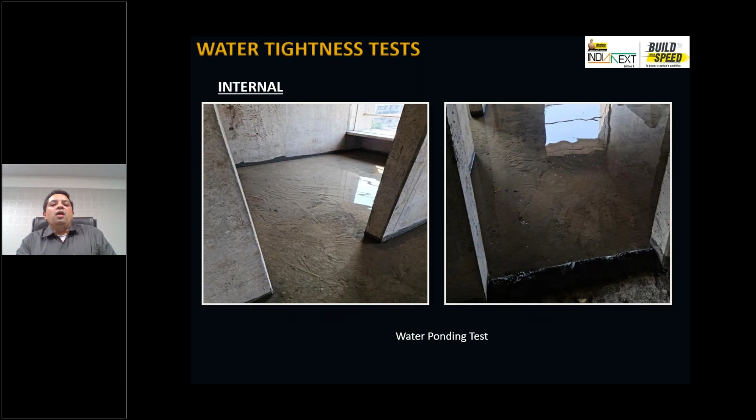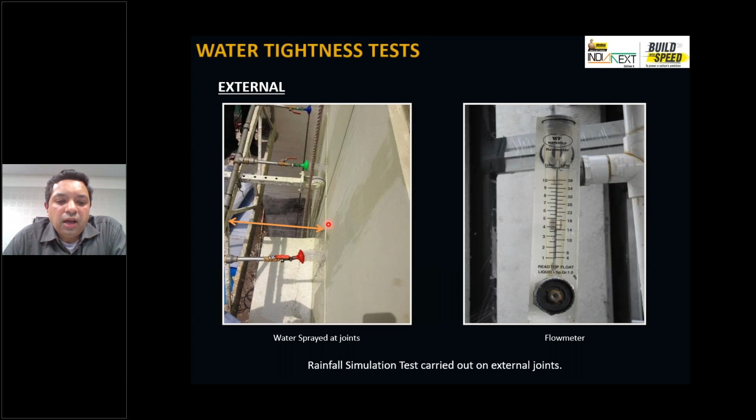Then for the external joints also, we are actually looking at an actual sprinkler test. If you see, there are codes now which are specifying what the water discharge rate should be, how we simulate the rain. We adopted this at that time using Singapore detailing, but now it is in IS codes also. So all that is looked at, and then we are scoring our own buildings. That's how we are establishing the quality control or quality benchmark for precast buildings. If you are familiar with the Singapore system, there is CONQUAS; we call it precast building quality assurance system, so PBQAS.

But the Provident building we scored, and we have our own set of data now, so I know what score each building has, right? It's not 100 everywhere, some has 84; that score has structural, architectural, all those details. But as a client, if you want to walk the Provident building, you're going to go there. I'm going to show you that this is the finished flat. This has the score of 84. When I build your building, I'm going to give you a score of 84 or more.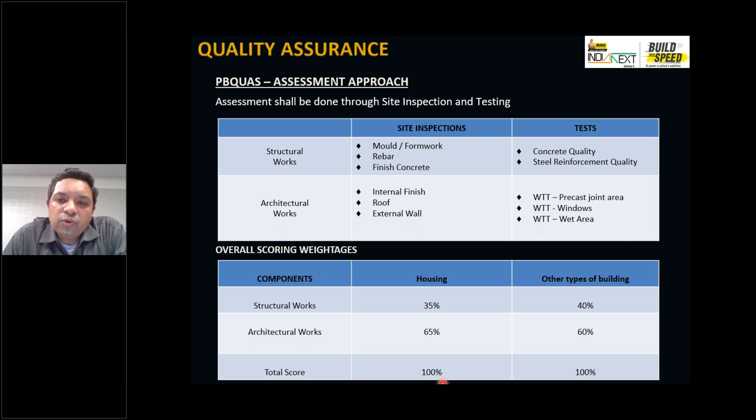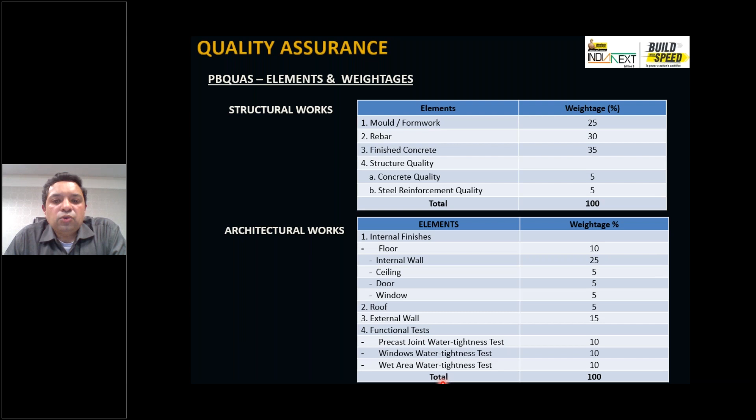Earlier, we did not have that kind of database. Now I have my benchmark set. You will get a building better than Provident. How we'll track it is in terms of the scoring, right? So that's how we are doing it.

Now coming to the last part of the presentation quickly, our ongoing work, right? This CIDCO housing project, what we are doing differently. Like I said, we are right at the inception of it, so maybe next time we do a better focused presentation on just the CIDCO job. But looking at the value, this is one plot where we are doing about 7,400 units, about 1,500 crore or more total project, and about 66 buildings. We are doing about 25 currently.

But when you look at the speed, this is the plan, or this is what we had planned in terms of our delivery. So we are planned for about 30 floors per month. When the project peaks, every month, including all my cranes, I will be building 30 floors. That means 1 floor per day. That translates to about eight flats per day. That's the speed we are talking about.

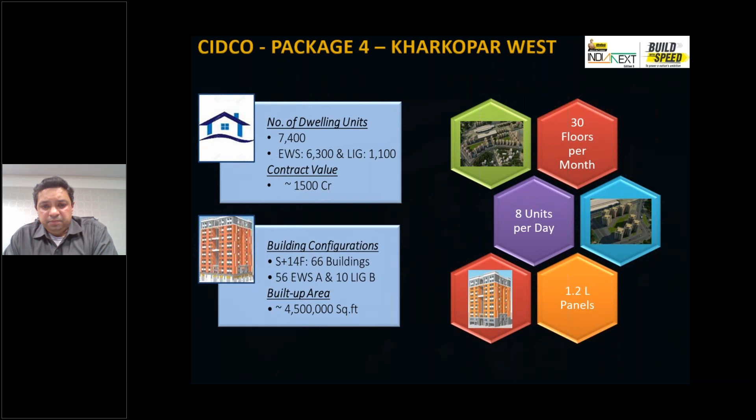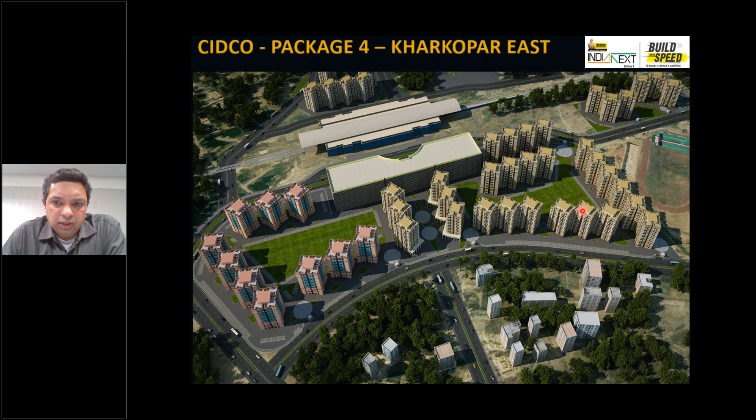How we'll build it is I have about 1.2 lakh concrete elements. Each element is about 4 ton or so, except the slab, and we'll be producing them in the factory, shipping them to the site and erecting. So imagine coordination of about 1 lakh plus elements. These are some of the photos of the overall plot that we'll be doing. There is another plot, and there is another scope somewhere else also. So these are the towers that we will be building. This work is ongoing now.

Now this comes to social housing, right? Mass housing. This is CIDCO for the PMAY scheme, but the architect is Hafeez Contractor. And on day one, they were very clear, saying, I don't want bland buildings, right? They have their own brand. I want my signature on that building. So we worked with them, sat with them, on all the reveals, all the bands, whatever they had envisioned.

Some of them were distributed so that I can make sure that the panels can be produced in the factory. This was the elevations that were planned using precast, right?

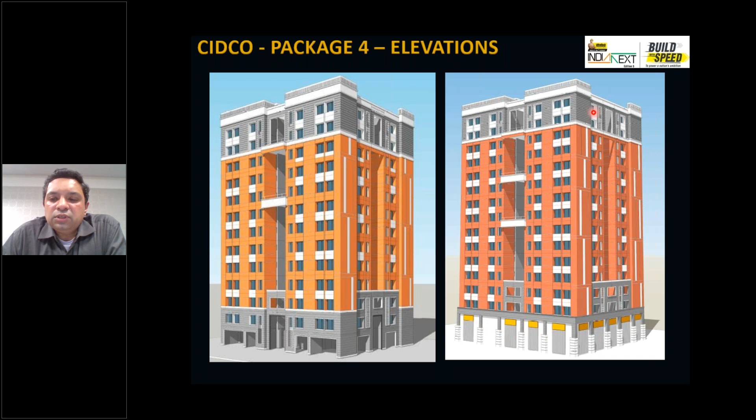When people say it has to have similarity and modularity, the bands are still there. I am still shifting the bands, we are doing enough work on that. I am giving whatever is needed at the bottom, at the top floors, and still making this work using precast. This is our factory now, that Mumbai factory.

Like I said, Mumbai rains, so I cannot afford to have an open factory. So about 11,000 square meter factory, with a capacity of about 2.2 million square feet of built-up area per year, will be producing using this factory.

If you want something relatable, about 180 panels per day is the capacity. At peak, we will be producing somewhere around 150 to 170 wall panels per day. Each flat is about 15 to 16 elements, so we are doing 10 to 12 flats per day production in that factory.

What we take pride in is most of these molds, whatever 3D, since we are moving towards PPVC, we built 3D molds only for the bathrooms, but everything is built in India. Some molds do come from outside, but all these newer things we make indigenously, so we have better control.

If you see this wall, we are experimenting where the putty is done at the factory, so even I don't have to take that activity at site. Whatever I can do at factory, I want to do it at factory, finish it, keep the panel ready. On the day of erection, send it, erect it, and forget it.

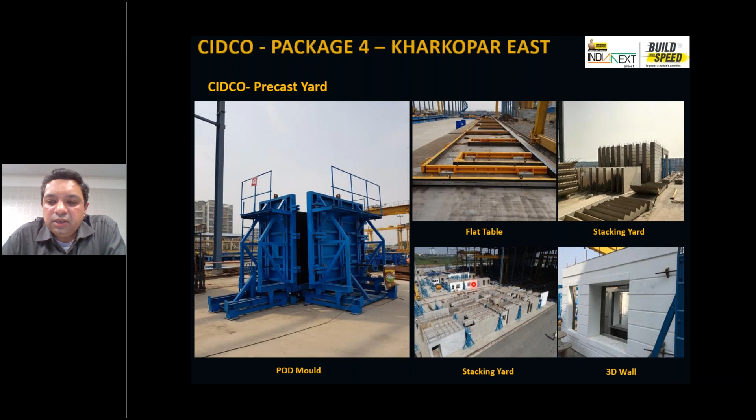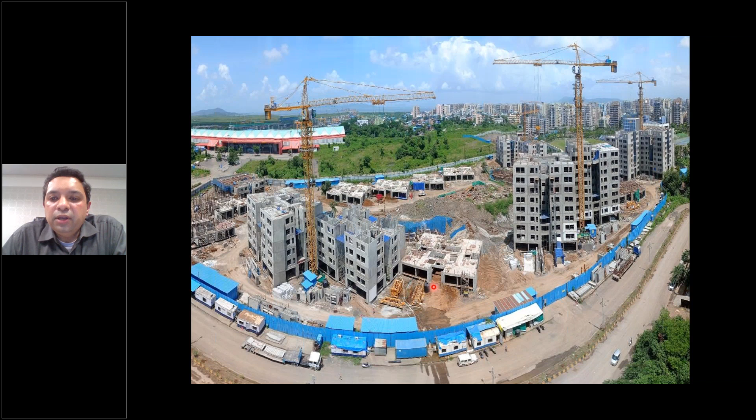This is one of probably about 2 months old picture of that whole plot going forward. In this entire plot, I have 5 tower cranes, 1, 2 here, 3 here, 4th here, and 5th. Work is going on. What you see is about 8 to 9 months since the picture was taken, and there is 2.5 months for COVID wave 2 built in here. So whatever you see is literally built in front of our eyes using 6 to 7 months.

So these are those finished buildings. This will get finishing, it will get painting, everything. Maybe in a couple of months we'll have finished pictures also. But like I said, this building, if you avoid the COVID delays, has been made there in about 6 months. This is our first building, it has been standing for about 6 months.

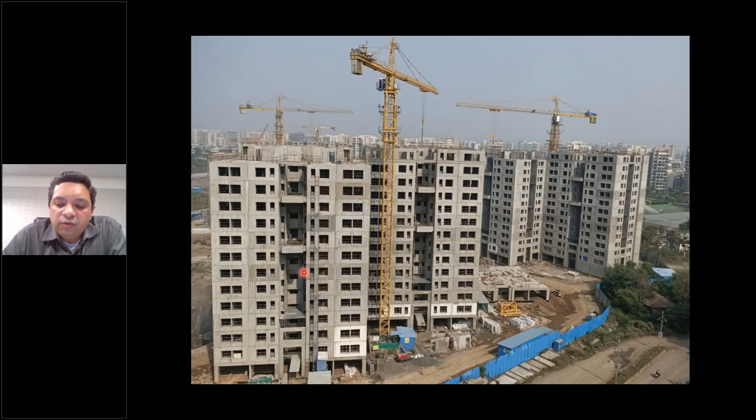So now come back to the last portion of the presentation, and we are looking at that 1.2 lakh elements count. I told you maybe 180 elements shipped every day, erected every day. So if I have to track that project, my usual Excel day-to-day tracking is just not going to be enough, right? I can't track that kind of scale. It has to have some kind of automation. So we said we are going to build digital solutions in place.

Again, this is the need of the project, I'm not forcing the digital solution, I have to do it, I don't have any other way. So anyway, the tender required BIM, so everything was done in BIM. That BIM was a central resource for all these agencies.

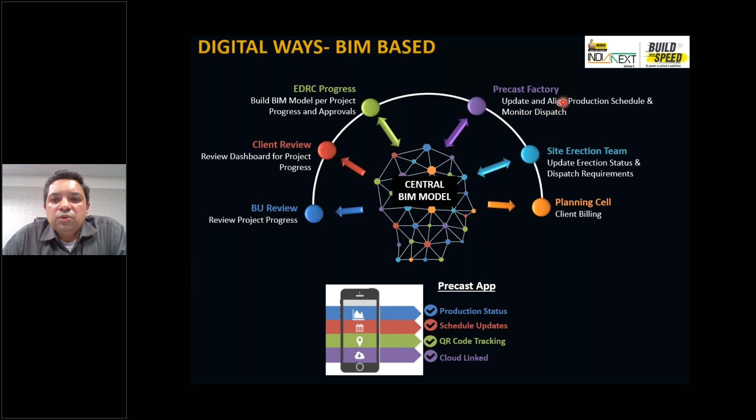This is what day-to-day coordination needs. I sit in BU, I review that. Client is looking at that. Design team is looking at that. Factory wants it, site wants it, planning wants it. So we started with the BIM model.

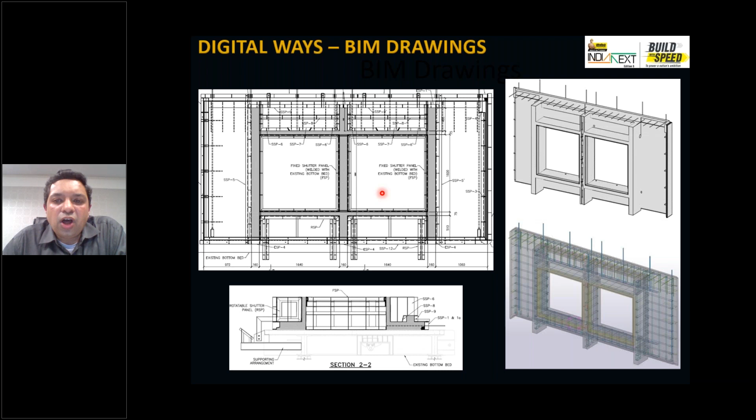That's where we specifically take the BIM advantage for precast. All my 2D shop drawings are prepared directly from BIM.

Now, once I have that, we built our own in-house app which will track all these elements. So that was my idea, to have each element tracked. This is still a work in progress, we are probably going full-fledged in usage by next year, I mean this year in March. But what that app is doing is tracking each element through its life cycle.

So when it was cast, with what concrete, when it was demolded, what was the strength at that time, who checked it, when it was sitting in the yard, who did the pre-delivery inspection, when it was picked up, sent to site. If you click that barcode, or scan the QR code with any phone, once I scan it at any stage, yard or site, it gives me the entire history of that panel.

That's how we track these elements in real time. Imagine earlier, panels were erected maybe a day before, then somebody comes next morning and puts it in Excel saying these panels were erected. By next day afternoon, he's circulating the report, and somebody looks at it and says, oh, this is not right. Then it gets flagged.

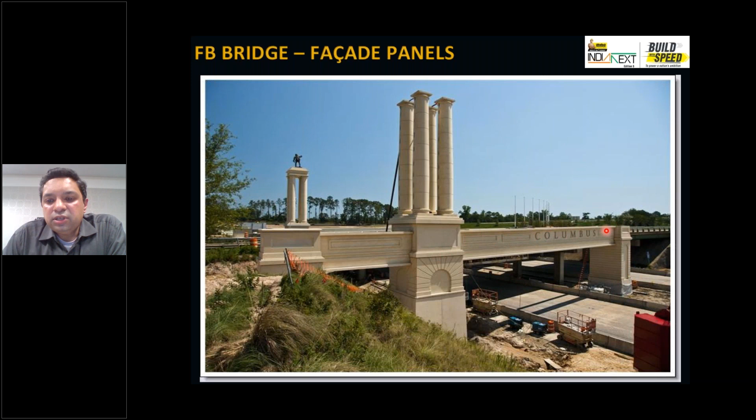This is a brick facade with a steel bridge behind it, but all the minor detailing, architectural detailing, including the name and everything, was done at the factory and just attached at site. This was done with traffic going under it - the cranes were operated from the sides because they didn't want to close the road. So the steel was erected in similar fashion, and then it was cladded with precast.

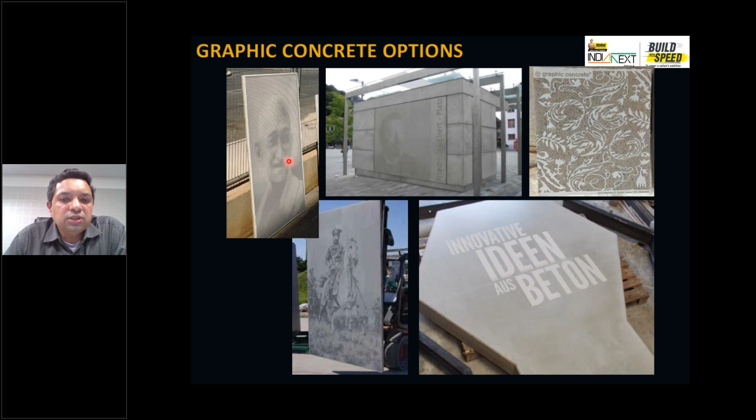With that, I thank you all. I know I've bugged you enough with precast, but we'll open it to questions. If not today, feel free to approach us anytime. If you have anything relevant, we would love to work together with you. Like I said in the beginning, I'm really looking forward to entries coming in for review of the projects. With that, I think Deepal will quickly run poll number 2, just one question, and then we'll open it for questions. Thank you all.